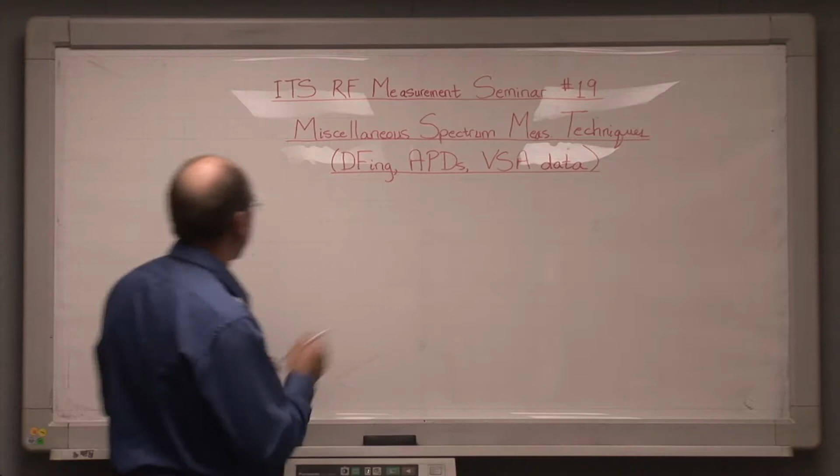The first subject I'll talk about is direction finding, shorthand DFing. I'm going to walk through these topics relatively briefly in this talk. This is somewhat of a survey. There are a lot of techniques for doing direction finding, making APDs, and VSA data in and of itself could be a long talk, but we'll cover these briefly.

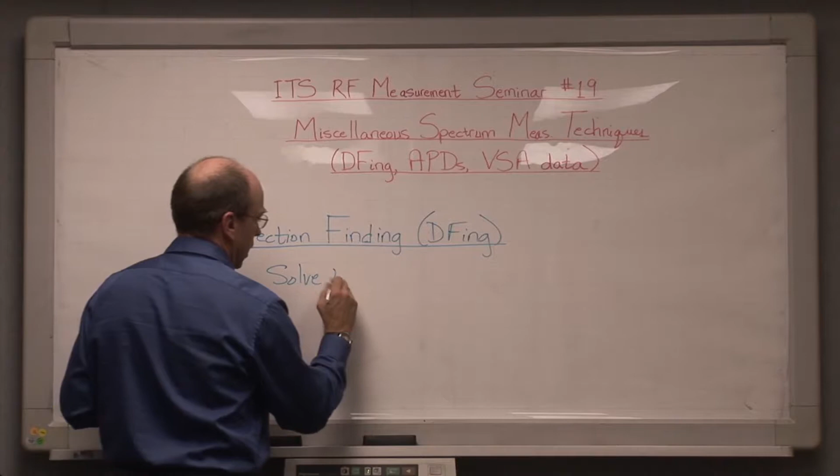Direction finding tries to solve the problem of identifying the azimuth of origin of a radio signal. I'm at pains to always point out that when we're direction finding on a signal, we're not necessarily direction finding on the azimuth where the transmitter is located. We're direction finding on the azimuth where we're getting the strongest received signal from a transmitter. I'll give a real-world example where the two are not the same. It's usually assumed that they are the same.

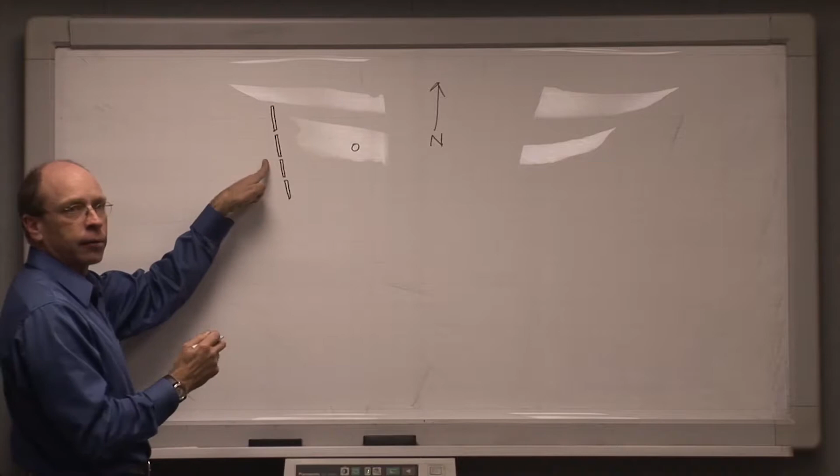Right here in Boulder, we have our laboratory building located at a given location on the Earth's surface. To the west of us we have a set of large rocks called the Flatirons, which seen from above, on a map where this is north, are arranged like this. From ground level or from the side they sketch out looking roughly like this. They're something like 1,000 to 1,500 feet high, tilted back at an angle from vertical, more or less like this. When we're experimenting with direction finding systems here at the lab, sitting with a radio receiving system and looking for the direction of arrival of the strongest signal on a given frequency, we frequently find that our direction finding system tells us the direction of arrival of the strongest signal points back to somewhere along the Flatirons.

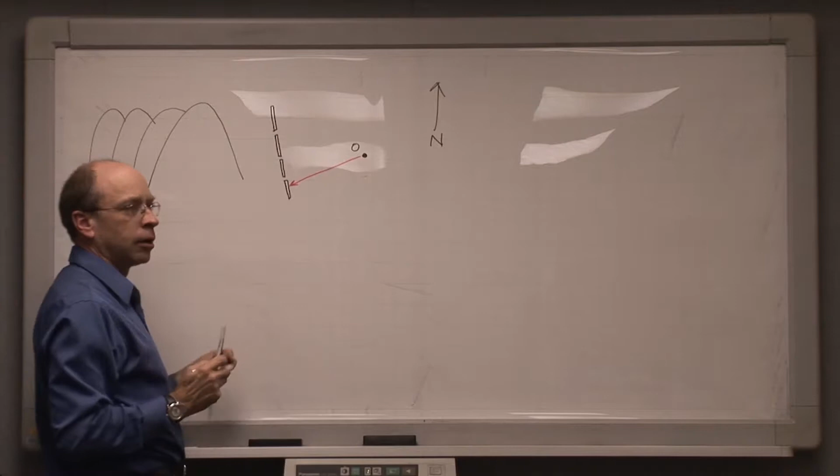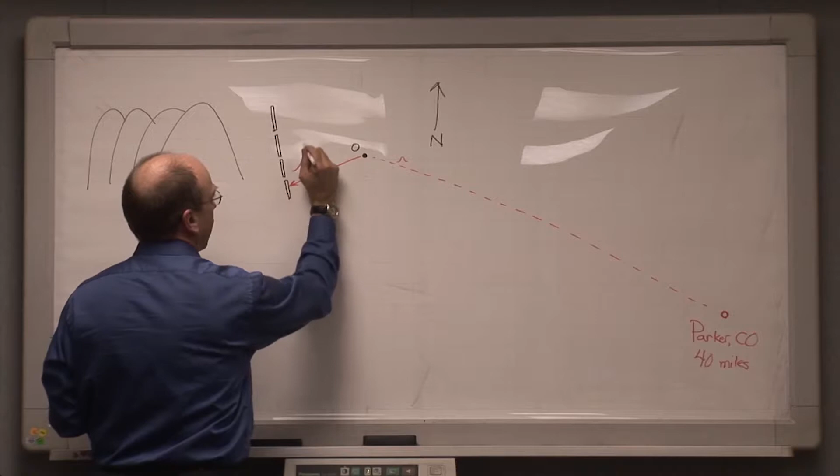We can, for example, do this with the local long-range air route surveillance radar. When we do that, we find that we direction find on the strongest direction of arrival going right back into these Flatirons, roughly west, maybe a little southwest of where we're sitting. Now, it turns out the location where the transmitter is actually located is, for example, at Parker, Colorado, roughly 40 miles from here. If we look in the true direction of the transmitter, we do see a weak signal being received in that direction, but on the frequency that long-range radar works at Parker, we see by far the strongest signal when looking in this other direction.

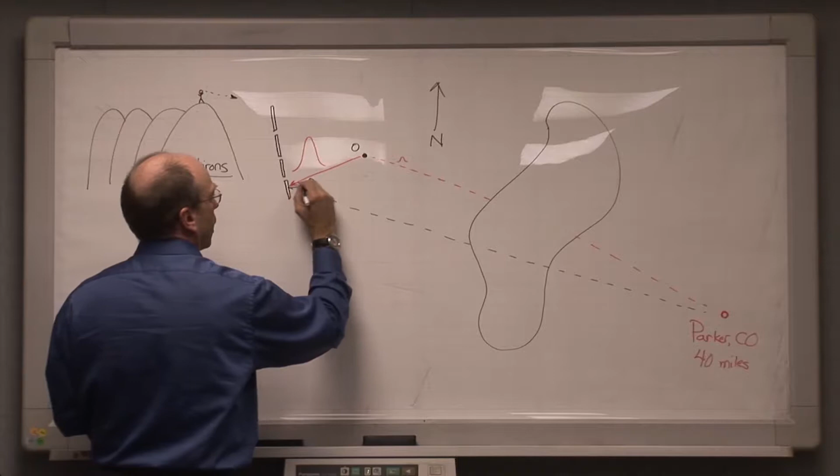The reason is there's a big ridge, which I'll draw like this, that basically separates our lab from the location where the transmitter is located. It effectively blocks the direct path for the radio energy, but if you could stand on top of these 1,000 to 1,500 foot high Flatiron rock formations, you'd be able to see back to the location where that radar is located. These Flatirons have a line of sight connection back to the transmitter. The energy from this transmitter moves this way and has the right geometry to hit the Flatirons at some angle of incidence relative to a normal to the Flatirons, call it theta, and comes off at the same angle theta, propagates in, and sure enough we get a direction finding solution that points back to the Flatirons.

Now, this kind of thing doesn't necessarily happen a lot, but it does happen in urban environments where we have big buildings and skyscrapers in the vicinity. It can happen in places, so just as a cautionary note: you are direction finding on energy, you're not always necessarily direction finding on the transmitter itself.

Obviously, if we're ever trying to locate a transmitter, what we would do is direction find from more than one location and triangulate on it. So, given that we're trying to solve this problem of identifying the azimuth of origin of the strongest signal, what are the ways to do it?

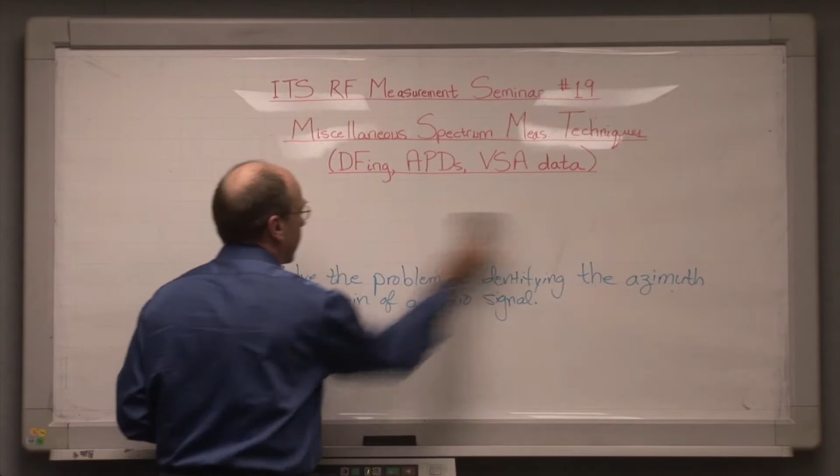The most obvious way is to use a directional antenna, typically but not always something like a dish antenna, where we use some sort of antenna that is, for example, a log periodic. It could be any number of antenna types, we could also have a helical feed, etc. We mount it at the focal point of a parabolic dish, and then use the parabolic dish to scan slowly around the horizon.

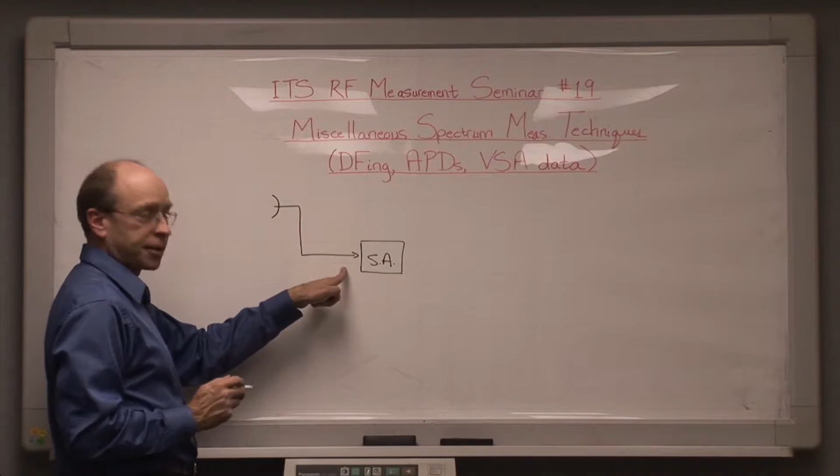As we do that, we have the dish connected to a spectrum analyzer. So we'll set it up like this. Here's our dish. We run this into a spectrum analyzer or any other measurement system that can measure power as a function of time, because what we're going to do is, in fact...

Run a time trace like so, and we'll measure power as a function of time as we rotate the antenna 360 degrees around the horizon. Let's say that it takes one minute to do this. And let's suppose that the signal we're direction finding on stays on continuously.

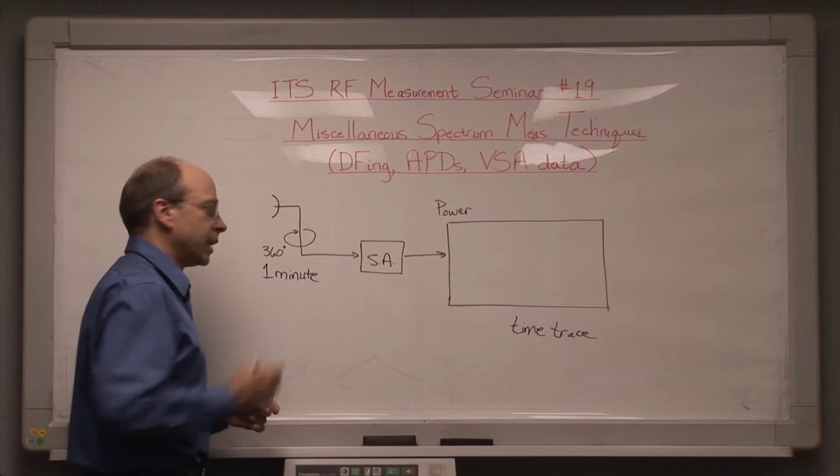If it doesn't stay on continuously, we'll talk about that in a moment. So we start the trace here at time zero. We're going to run the trace for 60 seconds. And as the trace is running, we see our received signal, and in fact we'll probably see something that looks a little bit like this.

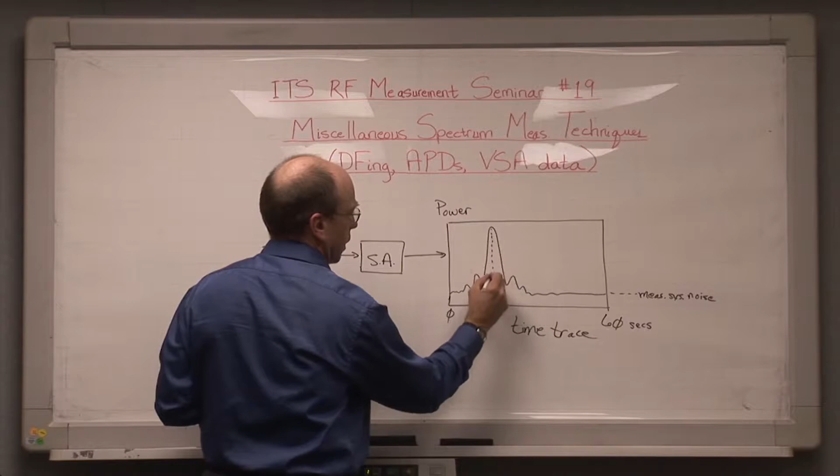Down here at the bottom of the trace, we have the measurement system noise. Here, at this point on the trace, we have a point in time that corresponds to an azimuth in space where the dish antenna was peaked up on the signal, so we can correlate this time to an azimuth. This would go from 0 to 360, so the way I've drawn this would be at an angle of roughly, this would be 0 degrees, 180 degrees, 360 degrees, about 90 degrees.

So this would be east, very straightforward. Now, what do we have over here? What are these features? Those features are the pattern of the dish, the antenna pattern of the dish. If the signal we're looking for is strong enough, we'll actually illuminate the pattern of the dish as we're rotating. So we'll see the pattern of the dish as we turn the dish around.

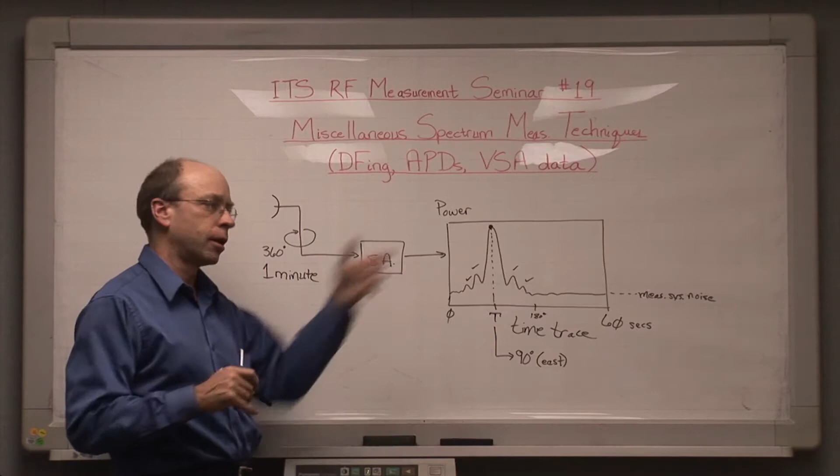Now, if we do in fact have multipath scattering going on in our vicinity—we have a building next to us, we have cars next to us, there are trees, there are fences—the real picture is probably going to be a little more complicated than what I've drawn here.

What we're more likely to see then is something that looks like this pattern, but superimposed on the pattern we'll see the effects of the nearby reflective objects. So we may see a secondary peak here, we might see a peak here, we might see some kind of peak here. These represent energy from the transmitter which is being reflected off of, say, a building, in this case maybe a fence, and in this case maybe another building.

If you're not sure when you're direction finding about what you're seeing on a trace like this, and you're wondering what may be going on, here's an easy way to solve the problem. Move the measurement system slightly from the location where you're currently sitting. If these objects that I've drawn in red are generated by multipath, then if you go to another location close to the first one, but you move yourself say 100 feet or a couple hundred feet, what's going to happen is...

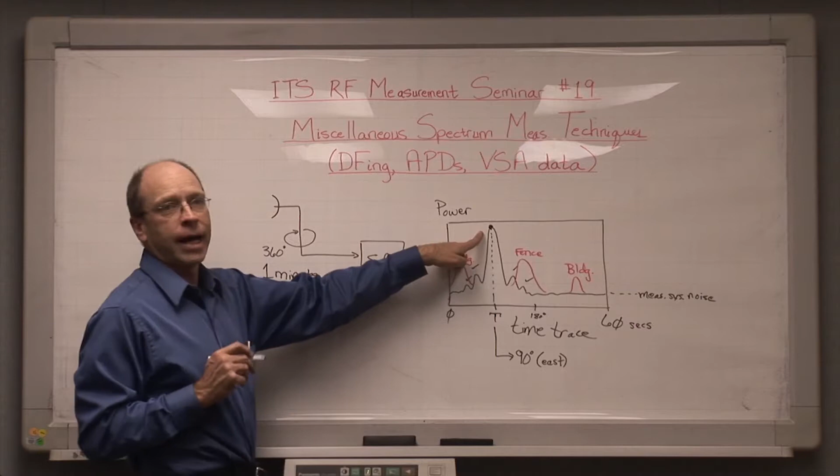If the transmitter is still located at a distance that is far away from you compared to the distances to the nearby multipath scattering objects, this is still going to give you a peak that's at about 90 degrees due east, and hopefully that is the strongest peak—although as I just said, it could be the Flatirons or some big rock formation, a big skyscraper. But the other multipath scatterers that are close to you are going to do two things: they're going to change in amplitude, and they're going to move somewhat in azimuth.

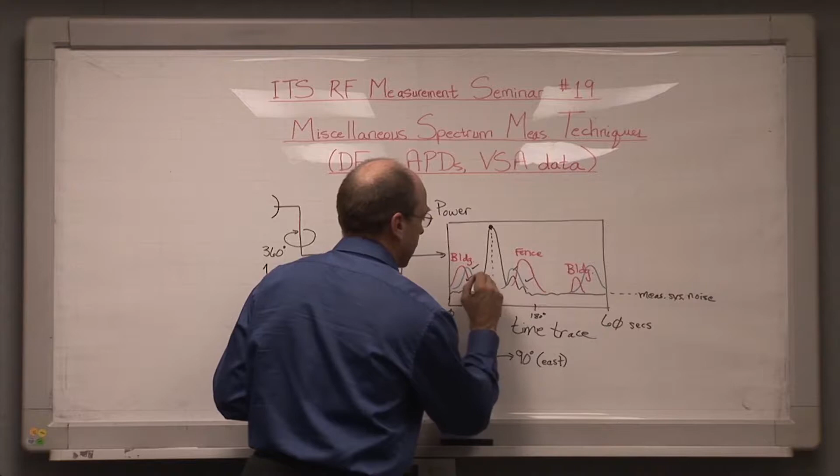So this one would move like that. This one might come in with a lower amplitude, and this one might actually develop a stronger amplitude, but again, it's going to move. If you move slightly, multipath generated by things that are nearby is going to change on this picture, but the energy coming from the transmitter at a distance far away compared to these objects should remain nearly stationary. In a case like that, we might see this move a little bit with a slightly different azimuth, slightly different amplitude, but not much.

This could help reinforce, when you're doing the measurement, the hypothesis that that is in fact the direction of arrival of the signal coming from whatever you're looking for. If you want to triangulate the location of that transmitter, you'll have to move a long distance from where you've started, far enough to give you a substantially different direction of arrival from this location.

If you do several points, this will begin to resolve itself into a sort of polygon of uncertainty, depending on how many points you take. The most likely location for the transmitter is somewhere near the center of the polygon.

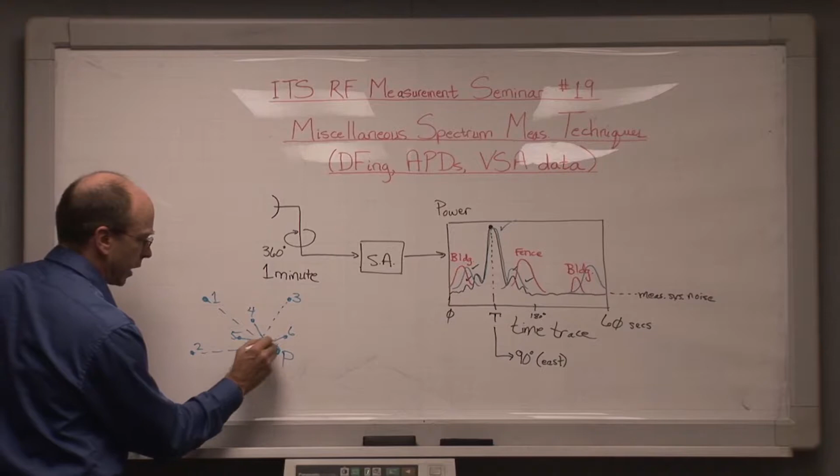To further refine your search using a directional antenna like this, you would probably want to come in closer and take another set of data points, say 4, 5, and 6. Now you'll have not this large polygon of uncertainty, but a relatively small one, and you'll rapidly home in on the actual location of the transmitter, hopefully.

Now, I just described this with the assumption that the transmitter stays on continuously. What if the transmitter is turning itself on and off intermittently? That's more problematic, precisely because while you're trying to scan the dish around the horizon, the transmitter is turning itself on and off.

We could imagine that while the dish is scanning around the horizon, the transmitter turns on during this interval, then turns itself off during this interval, on, off, and turns itself back on during this interval. Now the problem is that if we happen to be aimed in the direction of the transmitter signal while the transmitter was off, we're really not going to see it.

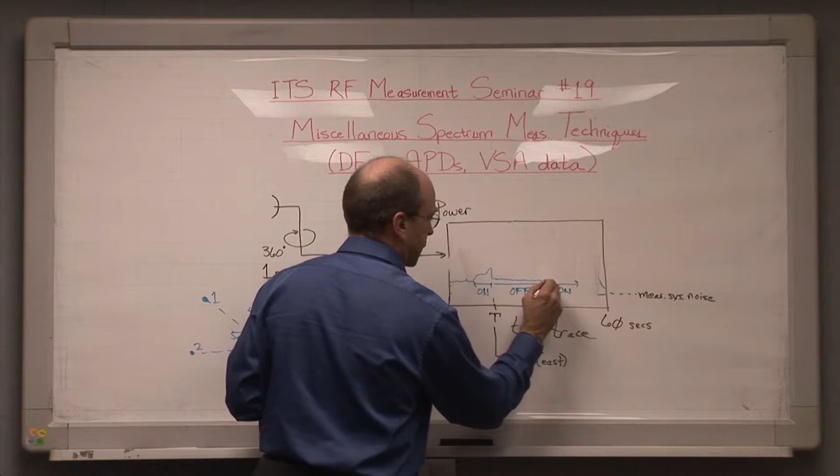So instead we might begin to see the transmitter here as the dish began to come into it, like so. Then the transmitter turns itself off. It stays off—here's the measurement system noise. It stays off. And by the time the transmitter turns itself back on again, we're looking nowhere near that azimuth.

So we say, well, this is rather odd. Instead of illuminating the pattern of our dish, what we got was some gradual increase in energy, and then a sharp truncation. If you see a sharp truncation like that, it's a good clue that the transmitter simply turned itself off at that point.

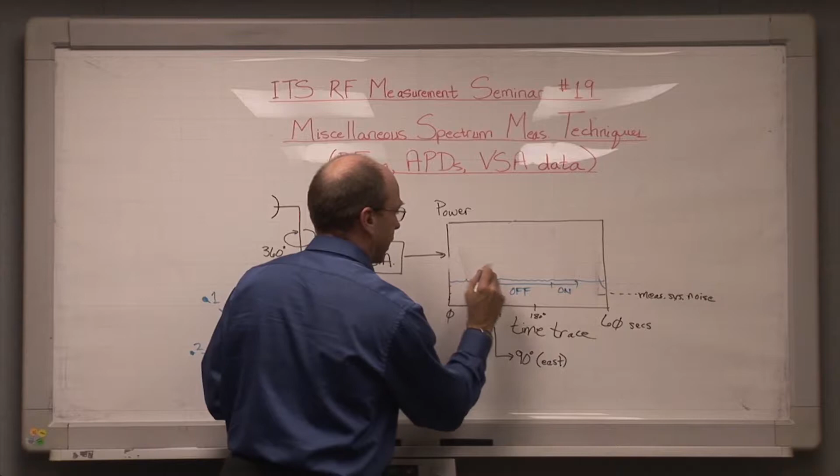The only way to get around this problem is to slow down the motion of the dish around the horizon, and maybe even stop it at certain azimuths and wait for the transmitter to turn on. We graph in some data points like this over a period of many steps around the horizon: stop, wait, get an amplitude as the transmitter turns on, move the dish a little more, stop, wait. A much slower process, filling in.

Oh, it seems to be something turning itself on and off with long off intervals. It becomes difficult to direction find on it.

Suppose that we need to run a mobile measurement operation.

We're looking for a transmitter, and we really need to move down a highway. Putting something large on top of the vehicle isn't a good solution for a lot of reasons. So what we really want, rather than a large antenna like this, is something small that we can use for direction finding.

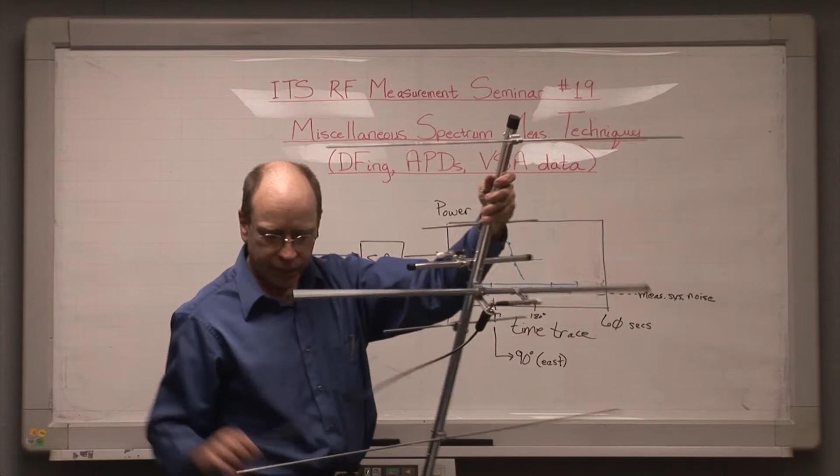If we're trying to peak up on the maximum amplitude, we can go to a smaller, lighter weight antenna like this, which can be held either in the back of a vehicle or out of a vehicular window, and rotated back and forth while we're mobile and moving down the road. This is still not a terribly practical antenna to hold out the window, although I have done it. This, by the way, is a Yagi.

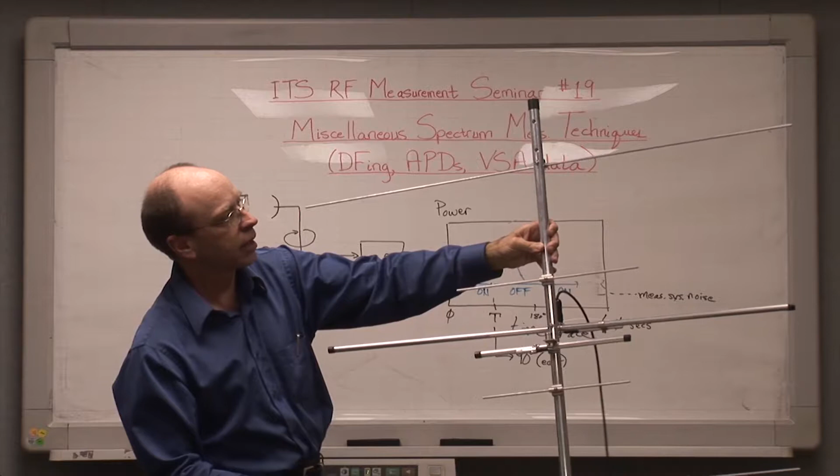This is an antenna made for a particular frequency, or actually two antennas in one, built to work on a small range of frequencies. We could just as easily do this with a wideband antenna, a log periodic array.

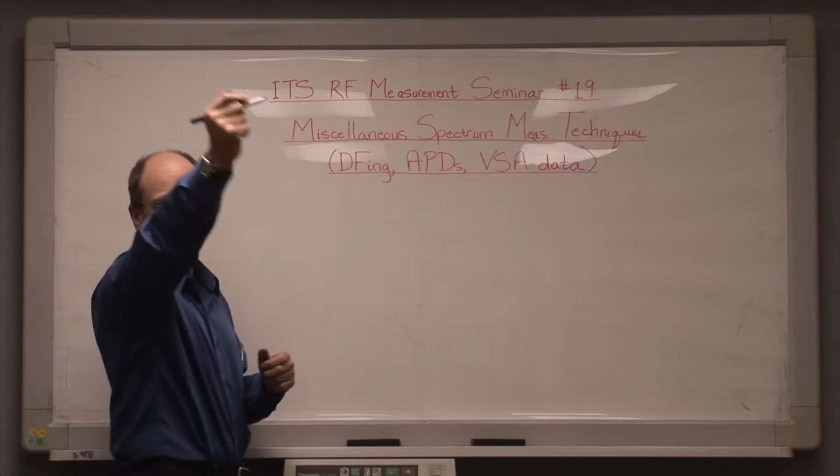But we'd like to go to an even smaller, lighter weight antenna, something extremely easy to hold out of the window of a moving vehicle while driving down a highway to direction find on a signal. The smallest, lightest weight antenna we can imagine, with almost no wind loading when held out a window, is in fact a dipole. We'll assume what we'd build is a half-wave dipole antenna.

Dipoles, in terms of this direction finding technique and construction, are practical for frequencies up to about a gigahertz. They become somewhat impractical above a gigahertz because the physical size becomes really small. At a gigahertz, a half-wave dipole is roughly about this big. Going much smaller than that is just not practical or feasible.

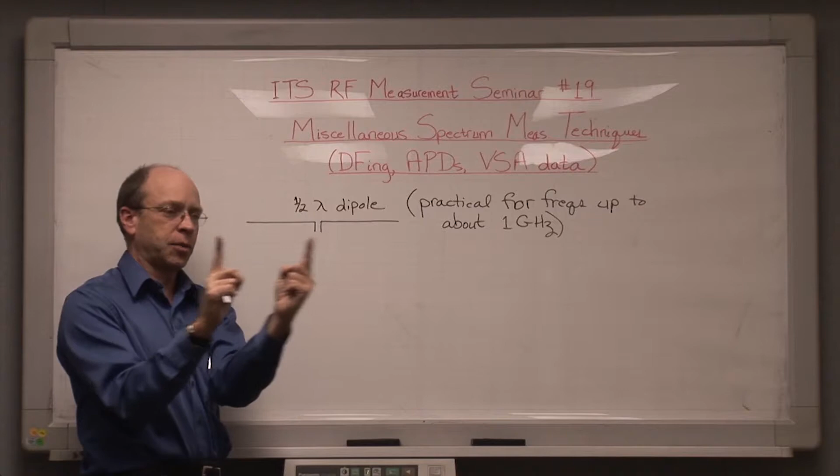But since a lot of the time the signals people need to direction find on are land mobile radio, aeronautical mobile, or other mobile radio signals not found above 1,000 megahertz, a dipole is not a bad measurement solution. But the dipole is not a particularly directional antenna.

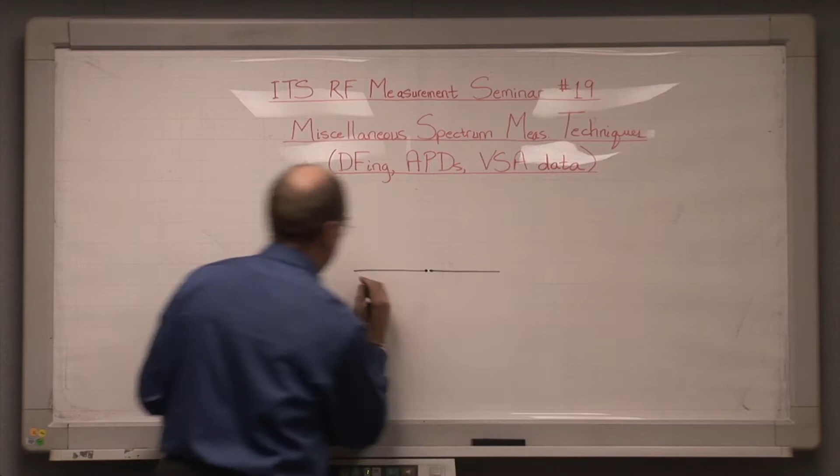The dipole antenna pattern looks basically like this. Here's our dipole. And the pattern, seen either from above or from the sides, has this appearance, like so. The gain of a dipole on either side is about 2.1 dB above isotropic.

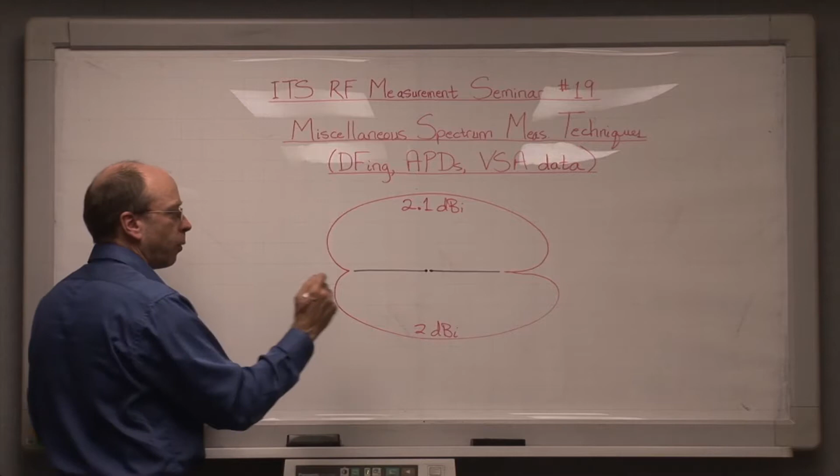It's fairly hopeless to try to direction find using that broad beam. So we don't. Instead of peaking up on a signal the way we would with a dish antenna to find the strongest signal strength, what we do instead is use the null off either end of the dipole to minimize the received signal strength, like so. So the trick here is to minimize received signal strength.

And the technique is still the same. In terms of how we use the spectrum analyzer, I'll just go to the next board.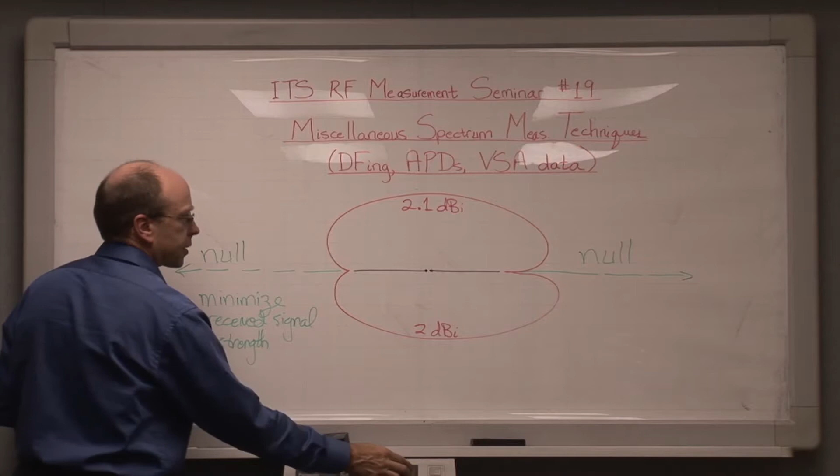What we'll do is assume we are going to operate a mobile direction finding operation. We're going to set up a vehicle, some sort of a sedan like this, not a particularly practical one. I'll draw the wheels slightly larger. There we go. And we're going to have a driver and a measurement person.

Someone, and I have actually done this, is literally going to hold their arm out the window, like so, and hold on to a dipole antenna, like so. And inside the vehicle, we connect the dipole into a spectrum analyzer.

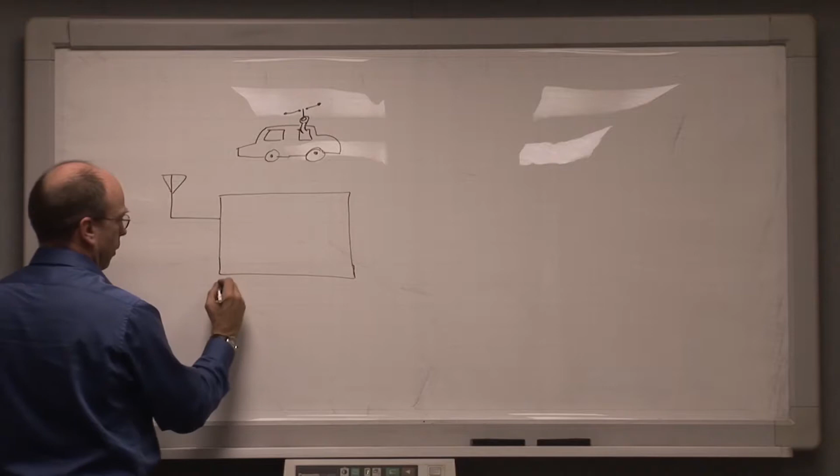Now we'll probably want to set the spectrum analyzer up for something like a 5-minute sweep time in a 0 hertz span on the frequency of the signal we're trying to DF on. And then we start running a data trace on the spectrum analyzer.

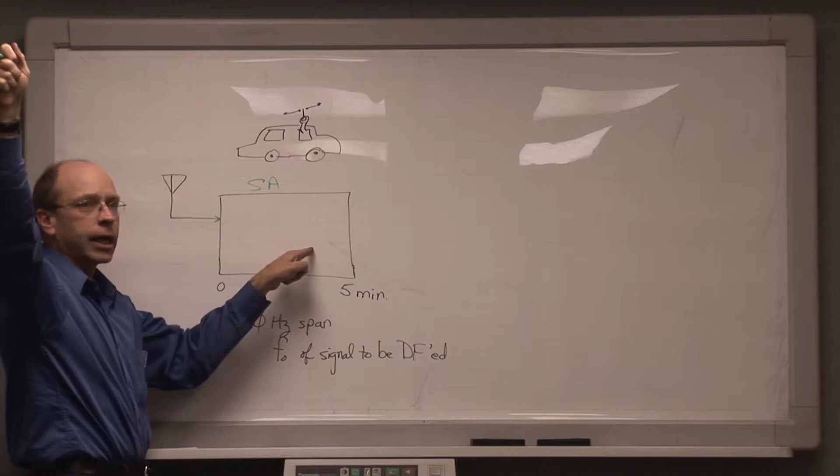As the vehicle is moving down the highway, you simply rotate the antenna back and forth while you watch the spectrum analyzer display. Obviously, the person doing this needs to not be the driver. And what you're going to see will be the signal on a frequency.

As you turn the dipole, it dips down, and as you turn it more it comes back up, and turn it more it comes down, turn it back and forth, and you simply note the direction the dipole is turned on whenever you're able to null the signal out, like so.

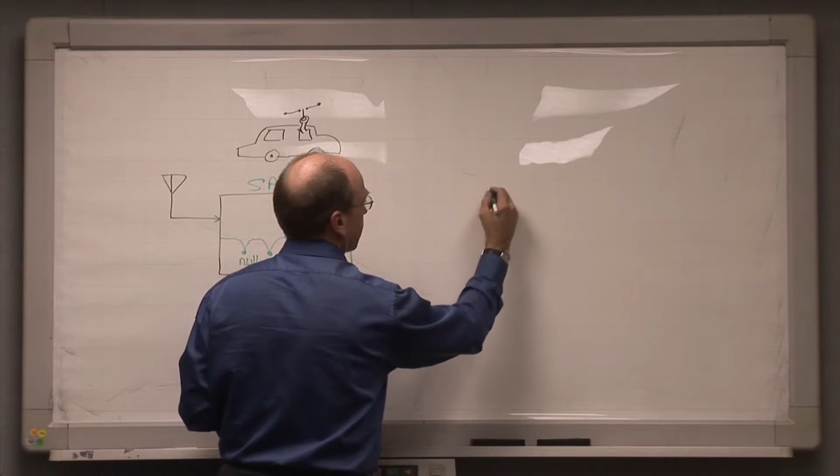That axis identifies the axis on which the signal lies. As we're driving down the highway, here's the highway, we're moving along it like this, and as we go, we find that whenever we have the dipole oriented this way, null, null, null - here's null 1, 2, 3. We say, ah, well, that's it then. The signal nulls when the dipole is held at this angle relative to the car, relative to the highway.

What we now know is the signal is either in this direction or that direction. We don't know which. If we were to modify the dipole such that we only had one null off the end, then we could resolve that ambiguity. Otherwise, what you have to do to resolve the ambiguity is either drive far enough along the highway...

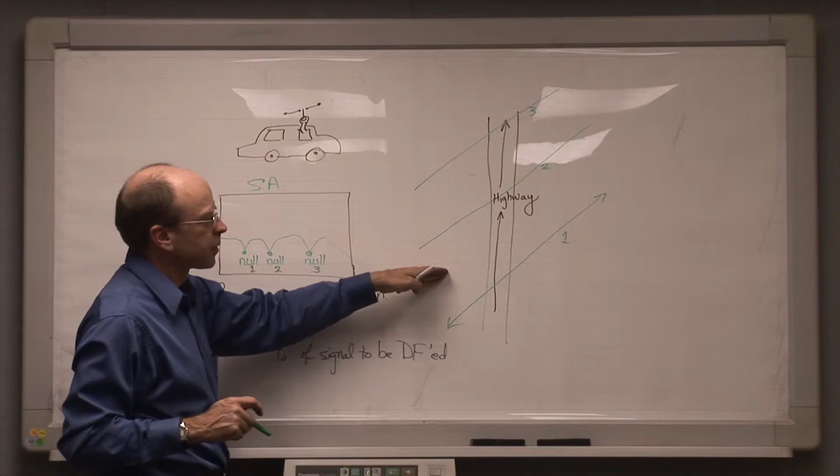...that you begin to get a change in the azimuth to the signal, in which case we know the actual direction of the signal must have been that way, or we actually turn a corner, drive onto a second road, which maybe goes like this, and then start direction finding as we're going along that highway. But the technique is very simple, very lightweight, very easy to implement, and I've personally used this with excellent results.

I like it for its simplicity and robustness. Now, if the signal itself is turning on and off while we're trying to direction find, the trace that I just drew will be modified like this. If the signal were to turn off right here, it would drop out, and then when the signal turned back on, it would come up like that. And if the signal were to drop out here, we'd see this happen, and then the signal would come back on.

The trick is to recognize that the signal is turning itself on and off because we're going to get these abrupt cutoffs where we get a sharp angle - we see the signal power drop instantaneously and come back up again. That's not likely to be due to encountering terrain or multipath. That's almost certainly due to the fact that the signal's turning itself on and off. So it's relatively easy to tell the difference between the signal turning itself on and off versus the nulls we get as we're physically rotating or turning a dipole from side to side.

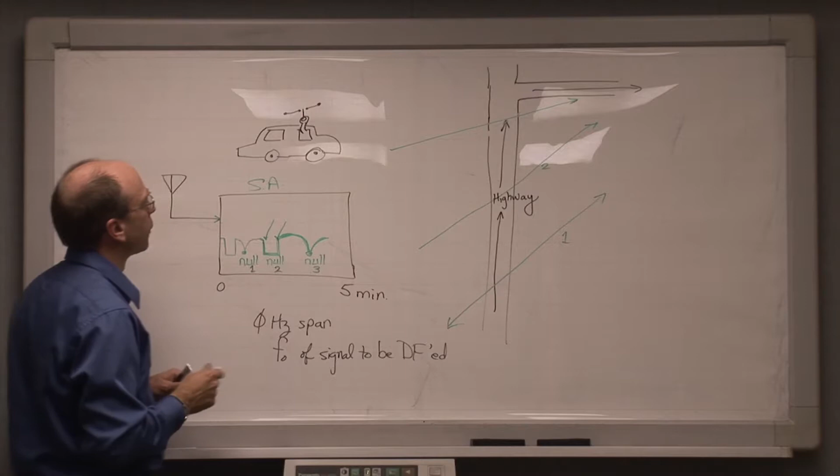Now, suppose, however, that we're not looking at signals that are land mobile radio type signals, or even digital communication signals which have fairly high duty cycles. Suppose that we're looking at the problem of direction finding on a radar.

We've talked enough about radars to know that a typical set of radar pulses graphed in time - here's received power - will look as follows. We'll see nothing while the radar beam is not aimed in our direction, or else we'll see very low amplitude, which is from the side lobes of the radar antenna. Then as the radar beam begins to look in our direction, we'll see a set of 10 to 20 pulses like this, and we'll see this kind of behavior happen every few seconds as the radar beam sweeps over our position.

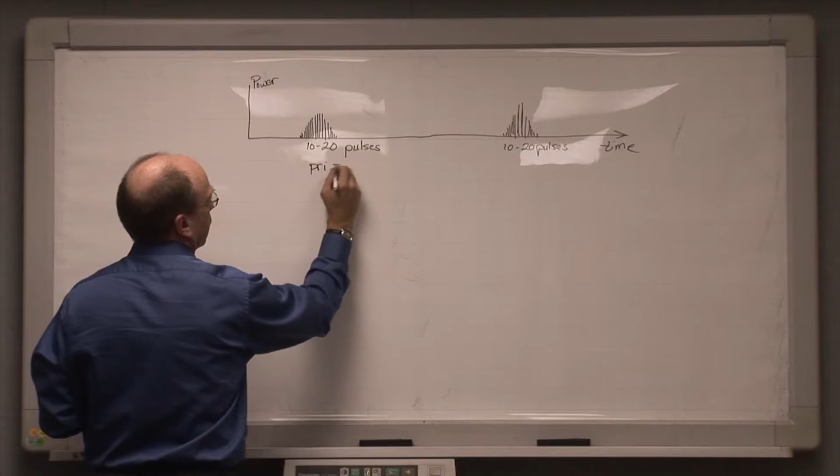And for typical air search radars, the pulse repetition interval will be something on the order of a millisecond. The pulse width will be something on the order of a microsecond. That's for air search.

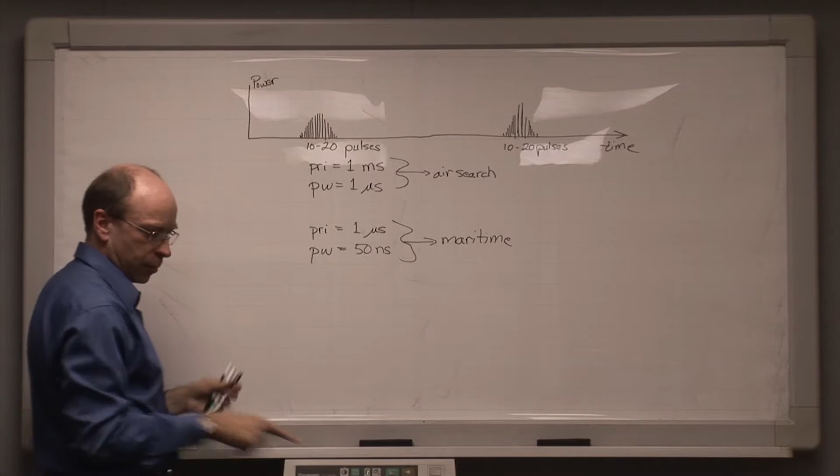The problem with trying to direction find on these kinds of signals by peaking up with a dish antenna - well, first of all, the dipole won't work because these are microwave frequencies, so that's out. Other similar types of systems won't work either, including dish antennas, because any scheme here that is based on a mechanical rotation of an antenna around the horizon is going to suffer from the fact that if we're getting a good direction finding solution by peaking up on the signal, we're going to be using an antenna to direction find, which is going to have something like about a 1 degree beam width.

This is the direction finding antenna. And in order to effectively direction find on a radar, we're going to have to actually move this antenna to a particular azimuth here. Then we're going to have to stop the rotation of the DF antenna.

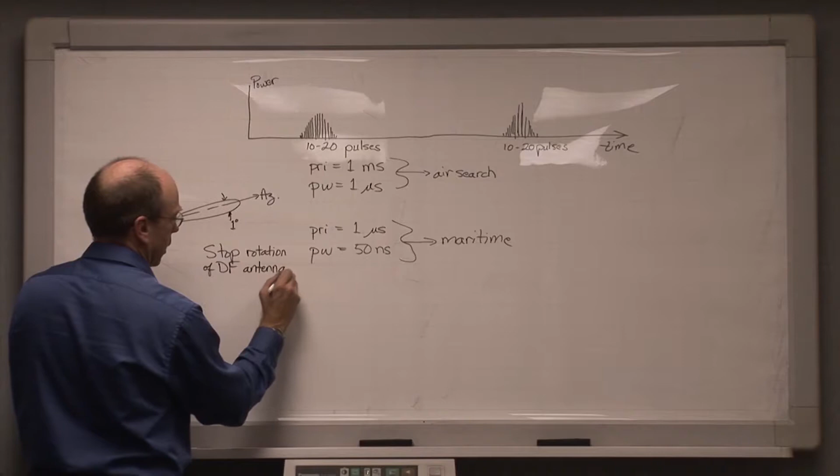And then we're going to have to wait for this interval, the beam scan interval of the radar, which for an air search radar may be, for example, 5 seconds, and for a maritime surface search radar might be more like 2 seconds.

Get an amplitude for receive power on that azimuth, and then move this antenna, the direction finding antenna, by 1 beam width, which is 1 degree. So this is the next azimuth.

And take that data point, and so we're only going to be able to move, in this particular case, 1 degree per, let's say, 5 seconds. And in order to scan 360 degrees around the horizon at 1 degree every 5 seconds will require 360 times 5 seconds, which is more time than we want to take to find a radar for 2 reasons.

We have a limited amount of time typically to work at field sites. Second reason is not all radars are going to stay on or stay present in the area long enough to be able to get an effective direction find on them before the radar itself moves away.

For example, maritime radars are mobile. We also have the problem of aeronautical radars. They're mobile. We also have the problem of any mobile radar.

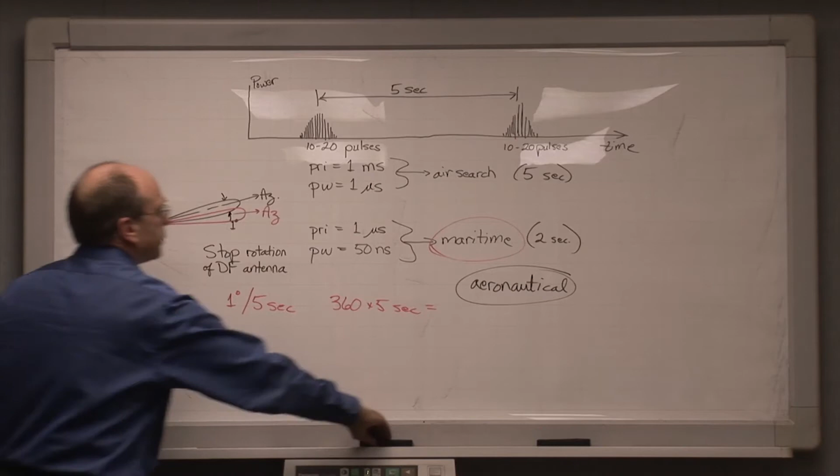So how can we do it? The way that we do it is to build, instead of a high gain dish antenna, although I should say there are spinning dish direction finding systems that are available. Their efficiency and efficacy is not necessarily always everything that you might desire.

But what we do instead is we build an array of low gain antennas, cavity-backed spirals, and we're going to use this array with a fast electronic switch to do the direction finding instead. Here's the principle of the thing.

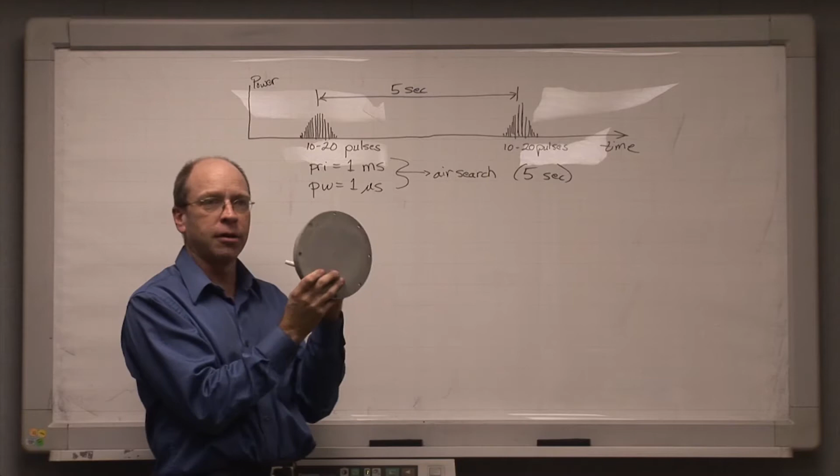A single cavity backed antenna like this has the characteristics of about a 90-degree angle between the 3 dB points in the antenna pattern. So here's 3 dB. And I'm going to draw the antenna pattern here. Here are the 3 dB points.

And I'm going to draw the antenna pattern in terms of antenna gain or response as a function of angle. This is going to represent an angle, ideally, a total of about 90 degrees. And then this antenna pattern comes down like this. And then we have side lobes coming off on either side, like so.

And what we are going to do is now set up an array of these antennas. And here we have an array that we've been building here at the lab.

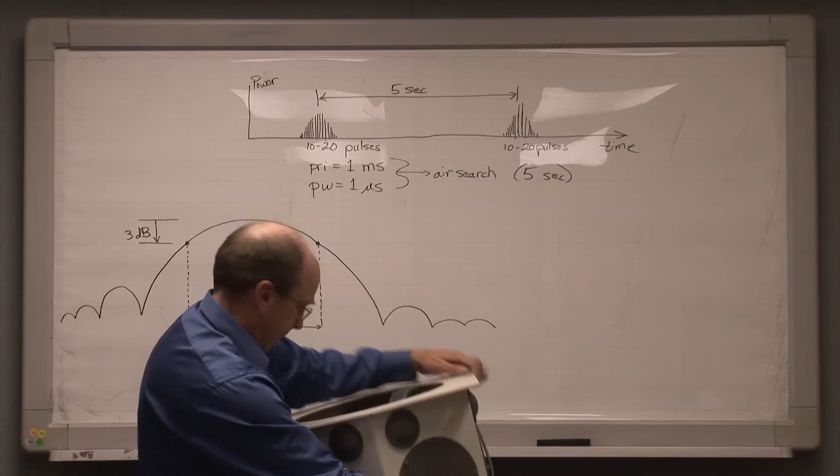This particular array happens to have 6 sides on it, 6 sets of cavity-backed spirals, and on each face of the array we have a low-frequency cavity-backed spiral that goes from 1 to 8 gigahertz, and then a high-frequency cavity-backed spiral antenna that goes from 8 to 18 gigahertz, so we have a total direction-finding capability here of 1 to 18 gigahertz. This array won't work for signals below a gigahertz, but most radar systems operate above 1,000 megahertz, 1 gigahertz. There are some radars that operate at lower frequencies, but the bulk of radars are in the microwave part of the spectrum.

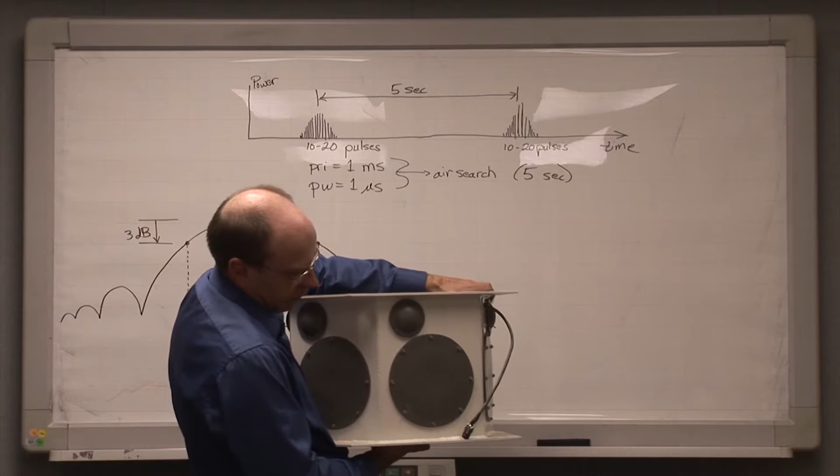Now, are these switched? Now, one antenna set yes. I'm going to explain the details in a moment, but inside the array, as we can see here, we have some electronic switches that allow us to rapidly switch from one antenna to the next as an input into a receiver. What's the principle?

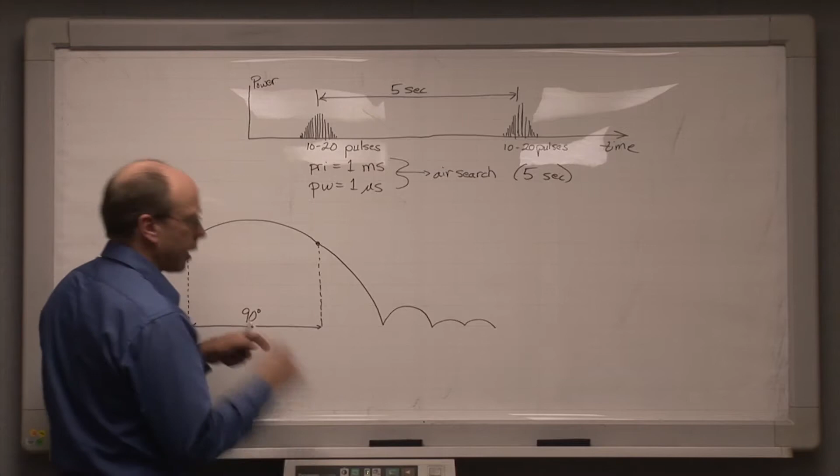The principle is this. Given that we have one antenna located in the array here with a 90-degree beam angle, so this is 45 degrees, we put a second antenna into the array at a 60-degree angle away from that, like so. I'm drawing the array as seen from above, rather crudely I might add. This is supposed to be a hexagon, all right. Like so. This is the array seen from above.

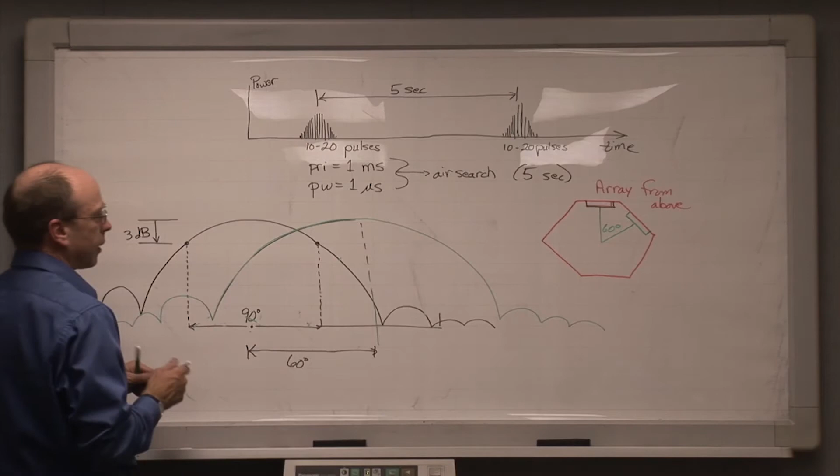90 degrees on each of the antennas. And the technique we use is to try to measure the radar pulses as they're sweeping across our location on both this first antenna, number 1, and the second antenna, number 2, like so. So here's antenna number 1, here's antenna number 2, like so.

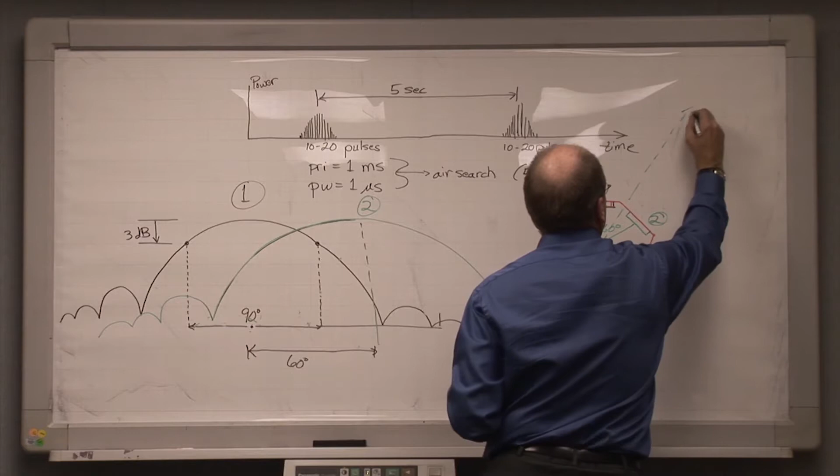Take that off. Now, if a radar is located in this direction, let's make it really easy. Let's assume, first of all, that the radar happens to be located exactly halfway angularly between antennas number 1 and 2. If that's the case -- let me erase this part up here -- then the radar emission is going to come in like this.

And if we can make a measurement of the radar emission on the first antenna and the second antenna while the radar beam is scanning itself across our array, across our location, we're going to get a data point back from this antenna that'll be some number like minus 46.2 dBm, and we'll get a measurement from the second antenna that'll be virtually the same, say minus 46 dBm. By virtue of the fact that we're measuring the same power on these two adjacent antennas, we know the direction of arrival of the radar has to be halfway in between.

Now, in order to know that the direction of arrival really was between these two antennas, we have to not only take a measurement on these two antennas while the beam is sweeping over our location, we have to, in fact, take a measurement on all 6 of the antennas while the radar beam is sweeping across our location.

Now this comes back to the characteristics of the radars we're trying to measure. What we want to do is get a measurement on a group of radar pulses that are almost equal in amplitude to each other. And when I drew this just now, I drew it a little bit, maybe misleadingly.

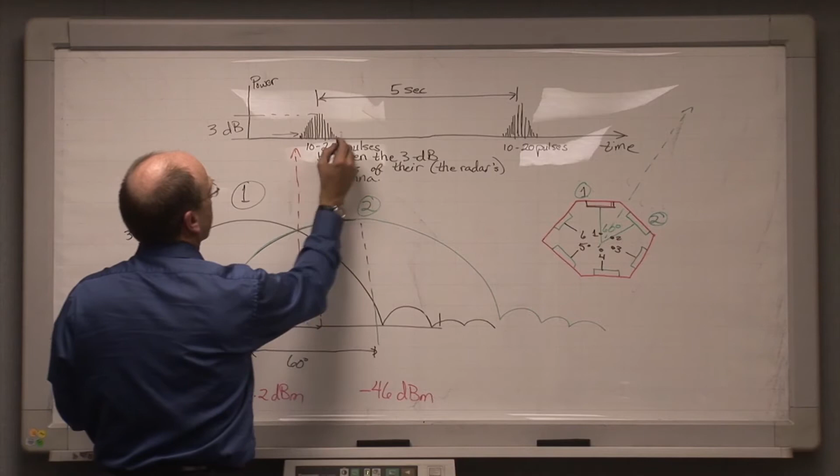So what we need to do with this array is scan the array and take data points -- 1, 2, 3, 4, 5, 6 -- one data point on each of the antennas within the interval that the radar takes to move its antenna across our location between its 3 dB points.

So to take the case of the air search radar, how long is that? Well, 1 millisecond between pulses -- the pulse repetition interval -- and we'll go worst case scenario, we'll say it's generating 10 pulses in that interval. That's 10 milliseconds. So for this air search radar example, we have to get 6 data points in 10 milliseconds. So we have 6 points in 10 milliseconds, and I'll invert that.

We'll make it 12 milliseconds just to make the math easy. So now we get 1 point every 2 milliseconds. That's how fast, roughly, we have to switch this array.

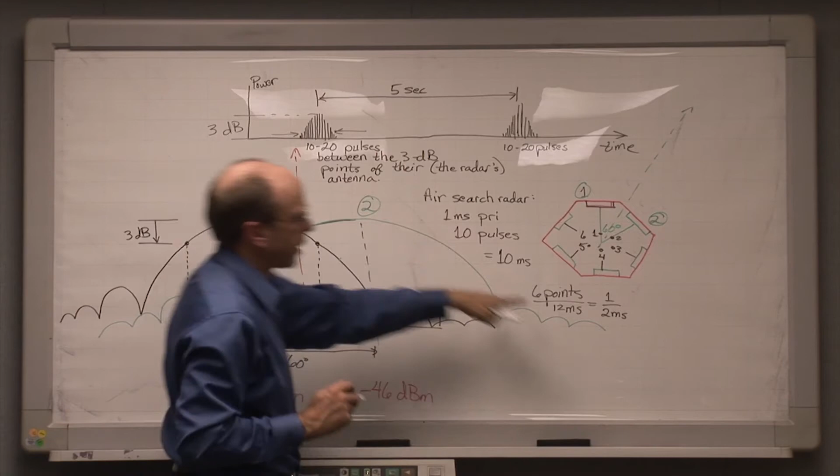Now, if we have a radar that has a pulse repetition interval that is a fraction of this, we're going to have to scan the array itself commensurately faster. There's no way to do that with a mechanical switch, so instead we use electronic PIN switching to switch these array elements rapidly.

But if we do switch the array elements rapidly, we can keep doing measurements continuously, taking each antenna every 2 milliseconds, and we run this array at this data rate, taking a power measurement off of each antenna every couple of milliseconds for a period of 1, 2, 3, 4, 5, etc., until we get to the point in time when the radar scans across our location.

Most radars will look in our direction within 10 to 12 seconds. So we have to keep up this sampling for up to about 10 or 12 seconds if we're looking for a radar on a frequency.

And as we're doing this, we actually load a data array, 1, 2, 3, 4, 5, 6, for the 6 antennas, and the depth of this array goes down for every rotation that the PIN switch does around the array. So we get a set of data points which are minus 100, minus 100, minus 100, etc.

When we're not seeing the radar, minus 100, minus 100, minus 100, over and over again, until finally, at some interval of a few seconds, we get a set of array elements which look more like...

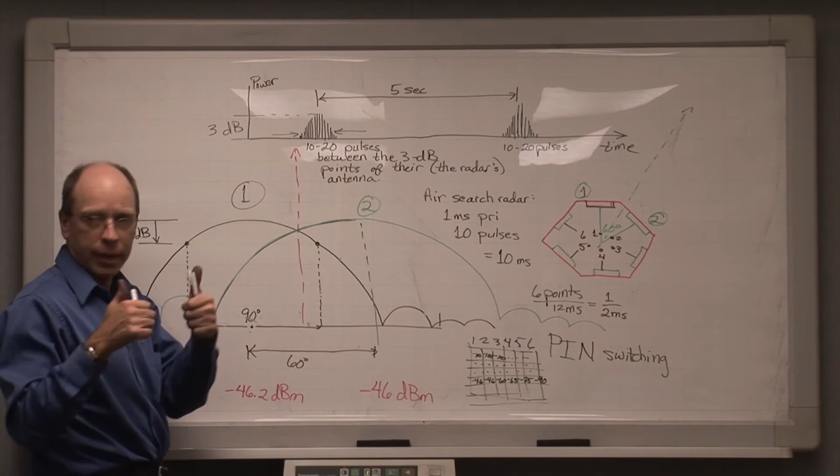In order to localize the radar's position, we first find the 2 adjacent antenna readings that gave us the 2 highest power readings. Hopefully they're adjacent. I have seen cases where they weren't adjacent, where this one and this one, for example, gave the highest power readings, and that's a bad solution.

In that case, we have to wait for the radar to come around, and we'll get it a second time. But assuming that we get 2 adjacent antennas that have the 2 highest power readings out of the 6, we then calculate the direction of arrival of the signal by comparing the strengths of those two readings off those two antennas.

Now, the case I just did is a very simple one. It's one where we got the same reading on the two adjacent antennas, and there obviously we can split the difference on the two. We know that this had to be the direction of arrival going out this way.

If the two power levels are not equal, let's suppose that the two power levels differ from each other by 6 dB. We'll say that this power level on antenna number 2 was the highest, and that the power level on antenna number 1 was 6 dB lower.

Easy. All we have to do is find the point between the two patterns where the difference between the two antenna patterns is 6 dB, and where antenna 2 happens to be the higher of the two patterns. And we then come down here and simply, in software, read off that azimuth.

Now, this direction finding technique relies upon knowing not only what the patterns of the cavity-backed spirals are, but upon knowing what those patterns are when they're built into this kind of a housing, which may itself be sitting on top of a tower, which may be sitting on a vehicle.

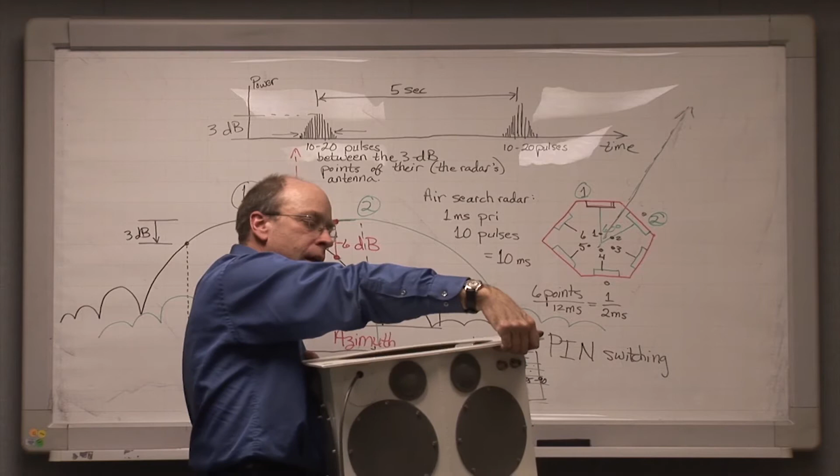And for this, we can actually take this housing out to an antenna range, and we can characterize the antenna patterns of each of these 6 antennas, hopefully they're all the same in the array, on an antenna range.

And having characterized those and graphed them out into a data array in a computer, it becomes a simple matter of doing a lookup: whenever you see power coming in from the two adjacent antennas with some difference between 0 and some larger number of dB, you simply find the point where that power difference occurs between the two patterns when you've picked up a signal, and you say, ah, we've got it.

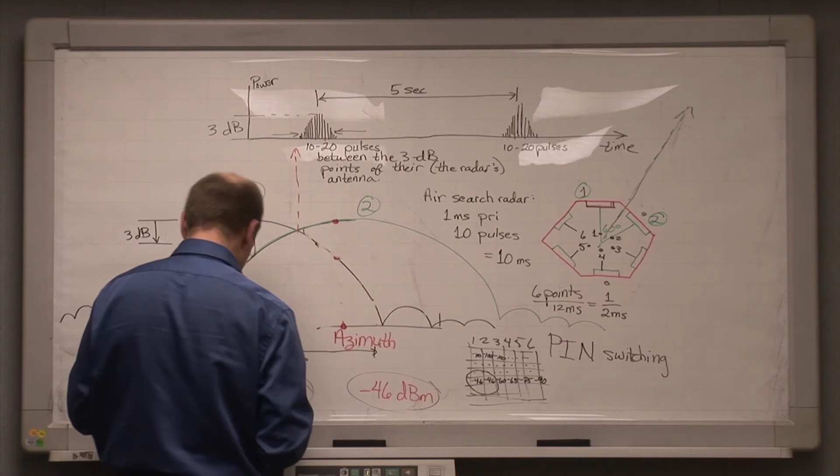Now, the problem that can occur with this is that we can get into an ambiguity. If the difference in power received between the two antennas is sufficiently large that we get a solution which gives us a delta - here's the delta - we'll say, for the sake of argument, that this is a 12 dB difference.

The problem we have is that there's not a single azimuth where we get a 12 dB difference between these two patterns. We get a 12 dB difference here, but we also get a 12 dB difference coming down elsewhere, and so forth.

The problem is that these antennas do have side lobes. If the power difference between two adjacent antennas is large enough to put us into the ambiguity region due to the side lobes, then we're not able to assign the radar to any particular azimuth. In the past, when I've had to deal with this, I provide a default.

I say that the radar is somewhere on antenna number 2, in this case somewhere in this quadrant, but we basically leave it at that. We could even say it's in this quadrant, but probably shifted over to this side. But we don't get a very good solution.

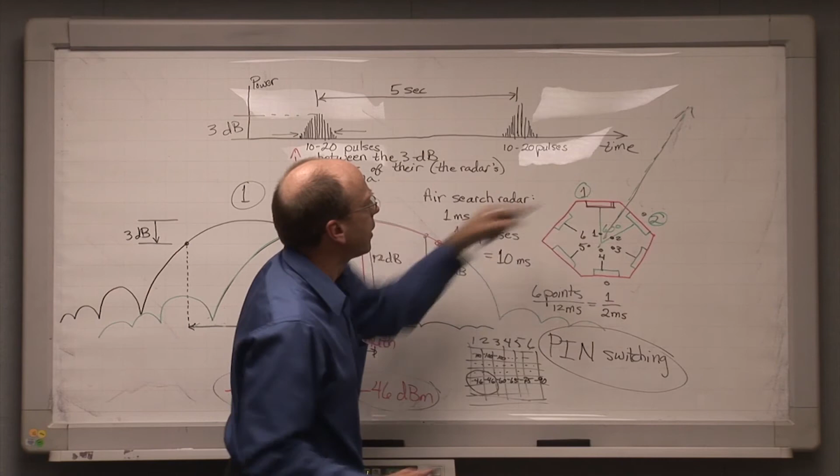It really hinges, other than the hardware you've seen here, on writing software that can process these data points rapidly, and on having electronic PIN switches that can switch the array fast enough to sample all 6 antennas within the time interval that a radar beam requires to scan across your position. That, of course, depends on the kinds of radars we're looking for.

One side note: if you ever go on a harbor cruise and look at Navy ships in any of the world's navies, you'll typically see bumps on the side of the ship that are 3 sides of a hexagonal array. What's going on is they've mounted an array like this on the ship, with 3 sides on one side of the ship and the other 3 sides on the opposite side, indicating there's a direction finding capability on board.

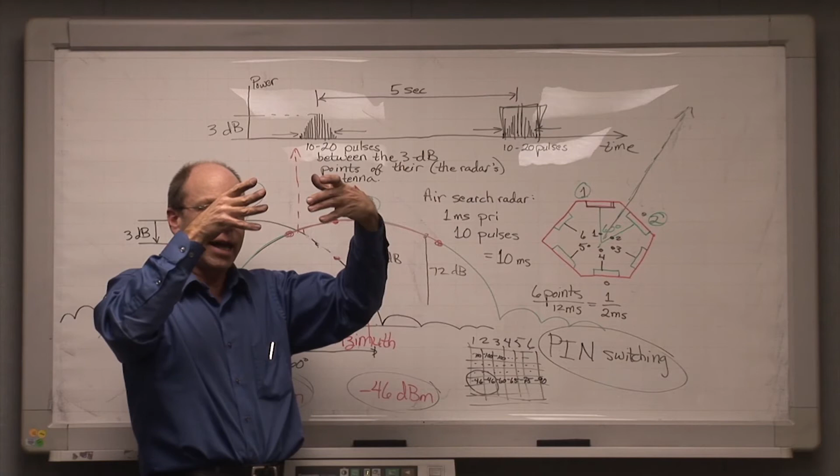You can see this with ships in pretty much any of the world's navies, and you'll often see two of these arrays - 3 large sides on the ship, and a smaller set replicated above it. What they're doing is operating just like we are with 2 octaves, except instead of building the antennas into one flat panel, they've got panels for the big cavity-backed spirals and another smaller set of panels above for the small cavity-backed spirals covering higher frequencies.

But it's a very straightforward direction finding technique. Any comments on that? All right.

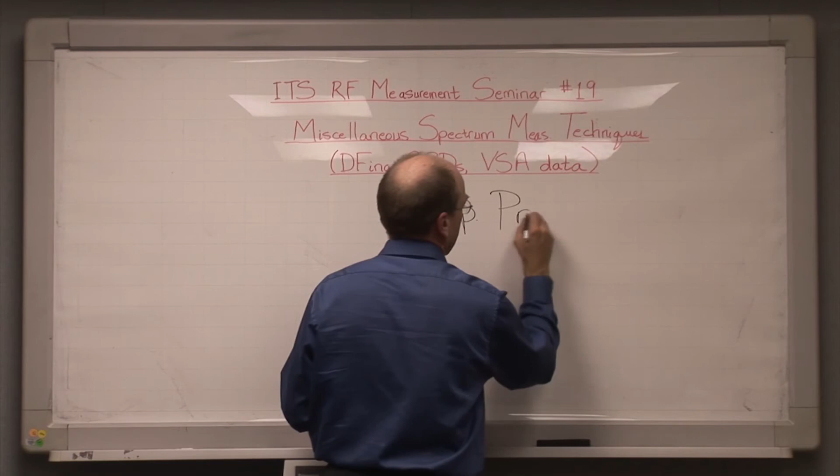Next, amplitude probability distributions, APDs. I'm going to cover these quickly, and the reason is that APDs aren't always covered in coursework, I think. I'll come to why in a moment, but first I'll describe what an amplitude probability distribution is.

An amplitude probability distribution is nothing more than a graph, a set of data points that shows voltage, or we can convert it to power. It's really a voltage threshold, graphed as a function of the percentage of time that energy, because it may or may not be a signal, in fact it's typically noise but not always, exceeds the voltage.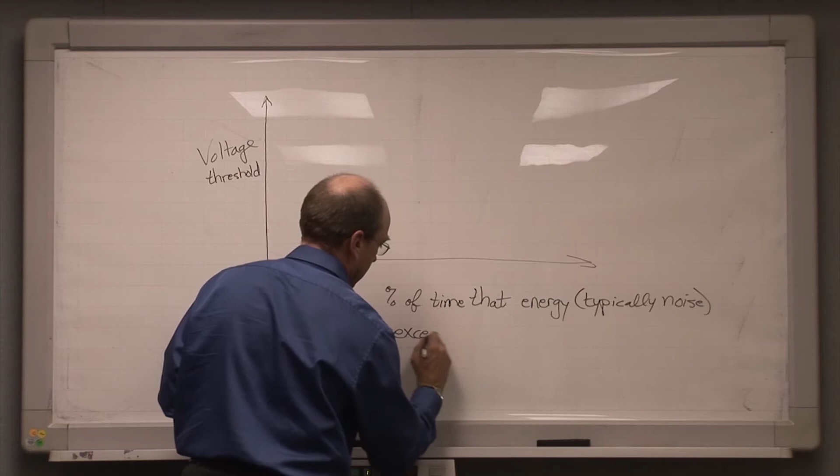The typical way to graph this out is to render the voltage into decibel units of power, which means this is a log plot versus the log of the percent of time that the signal or the energy or the noise is exceeding the threshold.

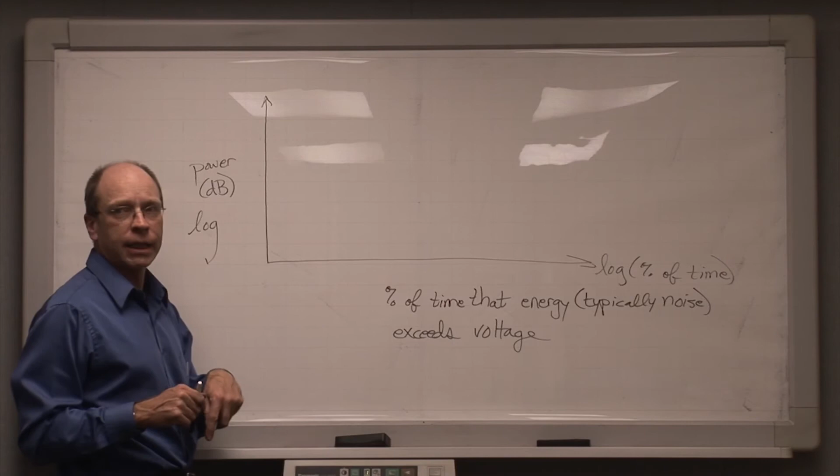Now why would a person want to do this? The reason is that although many radio systems today are built with the assumption that the radio receiver is going to have to work in an environment limited by Gaussian noise, in fact it may often be limited by thermal KTB noise inside the receiver circuitry, which, on this kind of plot, will produce a straight line with a slope of -1, and this could, for example, be KTB noise, thermal noise.

Although many radio systems today are designed assuming the radio will work against Gaussian noise, in which case we don't really need an APD, there are cases in which non-Gaussian noise occurs in an environment, and you usually cannot gauge the performance of a radio receiver in a non-Gaussian noise environment simply by measuring the average power in the non-Gaussian noise.

The reason is that the non-Gaussian noise is going to be somehow clumpy in time. Basically, for example, it could be pulsed. You get a high pulse of energy, then nothing, then a high pulse of energy, then nothing, then a high pulse of energy, and then nothing. If a radio receiver is trying to work in that kind of environment, that is a non-Gaussian noise environment.

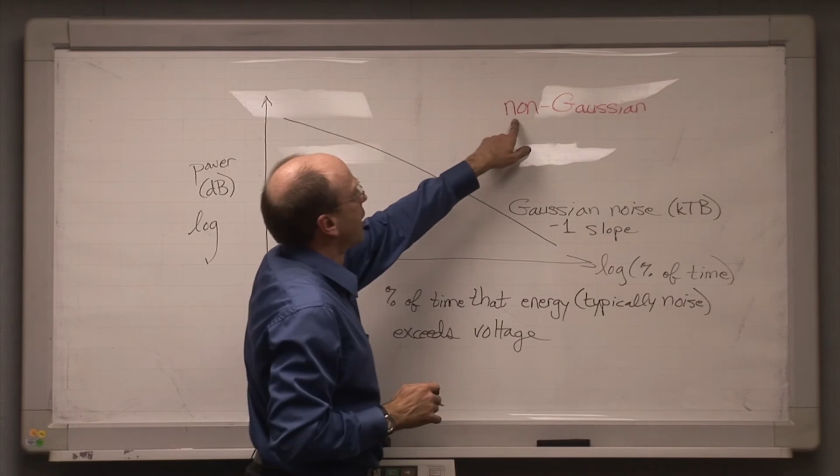Simply taking the mean power on non-Gaussian noise will not tell you how the receiver is going to behave, because the noise energy is coming in some sort of distribution that's somehow clumping itself up, pulsing itself. The statistics we need to assess the radio's performance then often have to be obtained from an amplitude probability distribution. So first I'll show how we get it, which is dead simple, and then I'll show what a typical non-Gaussian noise or energy distribution might look like.

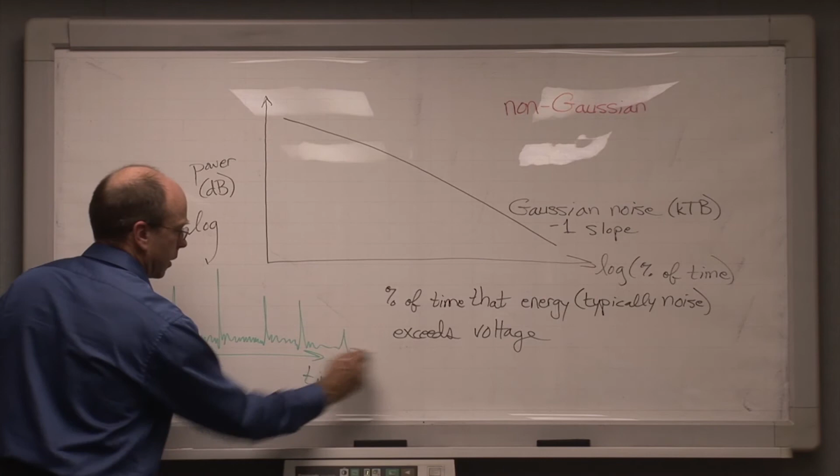To get the APD data, we go back to working in time, and we measure power. Power is a function of time, and we're going to see something like this happening. I'm drawing non-Gaussian noise here. Although unintentional man-made emissions can produce this kind of noise, other sources include lightning, which is a problem down at lower radio frequencies. Back in the old days it was a problem down in the AM radio band, but lightning, ultra-wideband transmitters, etc. can produce non-Gaussian noise.

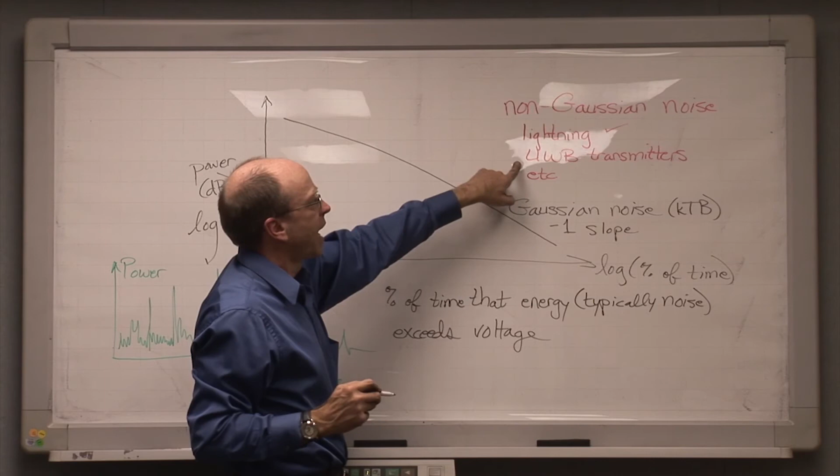So in the old days, people were worried about building systems that might encounter noise from lightning. Nowadays, people might be worried about building receivers that have to work in an ultra-wideband transmitter noise environment. In either case, we want to get the statistics on the time waveform, and what we do is sample the time waveform like so. Very simple, dead simple. We need to sample it long enough to make sure we're getting a good representative set of data points.

Then, all we do, using software, is produce this set of thresholds, and it's really nothing more than a sorting problem. We sort all of the points that we took through some interval of time, and we simply plot the percentage of all the points taken over that interval, in terms of their power level, versus the percentage of time, which is the same as percentage of points that exceeded some given power level.

For example, we have basically one point in this whole array that hit this nice high power level. So we have one point up here, and as we come down, we don't have too many points at these higher power levels. We've got one here, we keep coming down. Oh, there's one, there are two, there are three. So now we have a lower power level, but more points exceeding that power level. So we get something that looks like this. And as we graph this out for the non-Gaussian noise, we get a curve that looks typically like that.

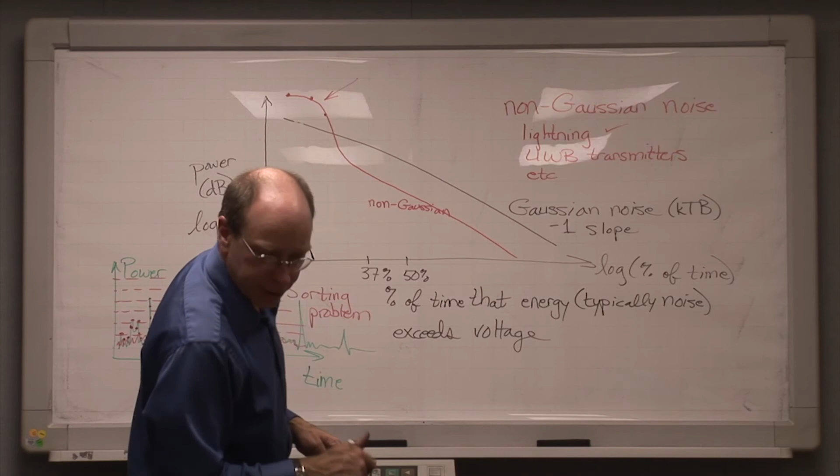Up here we're seeing the effects of the source, the lightning, the ultra-wideband, whatever it might be. We can use some particular points in this graph. Let's say this is 37%, and this is 50%. At about 37%, we have average power. We can also graph average volts, and we can also graph median power at 50%, and so forth.

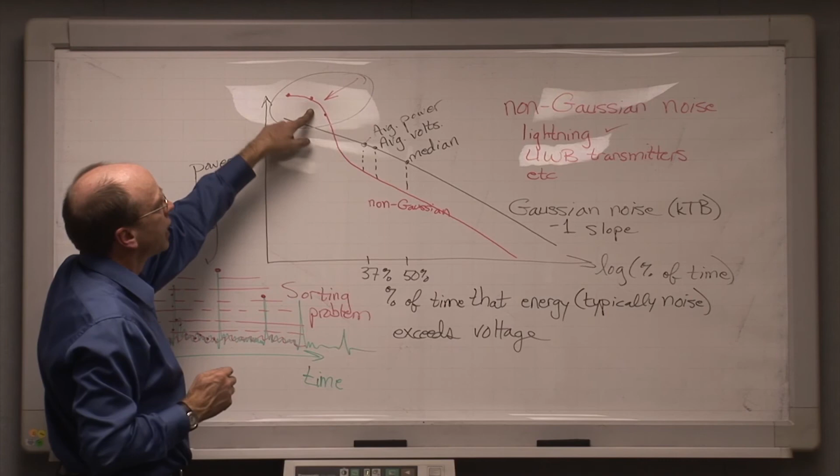The beautiful thing about this, and we can do the same for non-Gaussian cases, is that with the APD we can see what this characteristic looks like. At NTIA, we've used these data graphs extensively in analyses of the performance of receivers in the presence of emissions from ultra-wideband transmitters. I'll leave that discussion there, just to point out that this tool is available. It's relatively easy to get the data graphs, and a person could go through their entire career without ever working with this, but if you're ever working in a non-Gaussian noise environment that may degrade receiver performance, it's worth knowing that APDs exist and are needed.

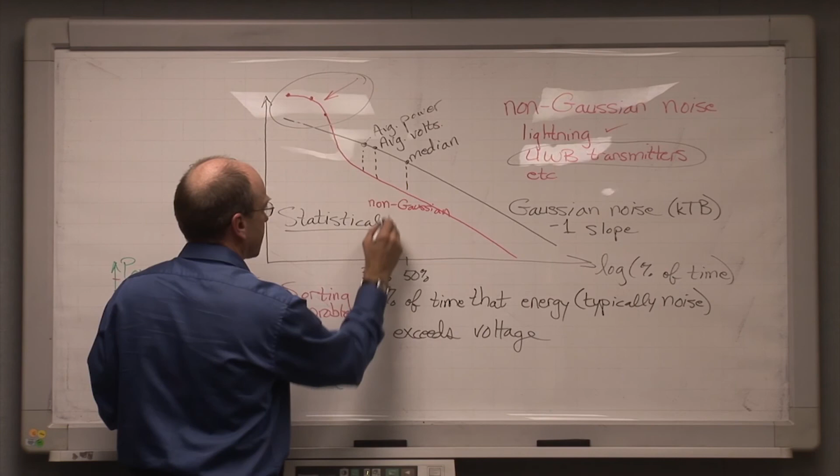One last thing: if you have an APD graph like this, you cannot go backward to reconstruct the time diagram. For example, if we had pulses coming through that were, say, 1 millisecond apart, we cannot get that 1 millisecond pulse spacing off the APD. For that, we have to go back to the original time data we collected to see what the spacing is. So the APD gives us a nice statistical picture of noise, but it does not allow us to go backward to what the noise looked like. If you want to see the spacings between pulses in time, you'll need to retain the original noise data.

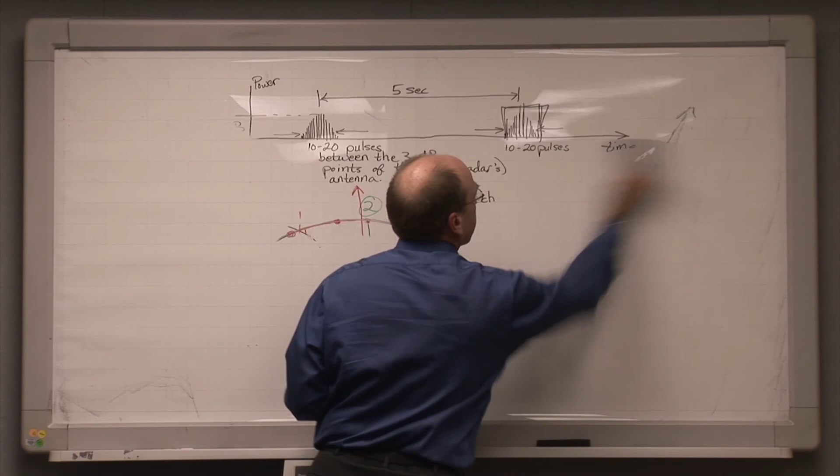The last topic, which I'll just touch on briefly, is data that we can take from a time sampling machine, a vector signal analyzer, which here at ITS we've typically used on radars, but it can also be used on digital data signals. I'll cover these very briefly.

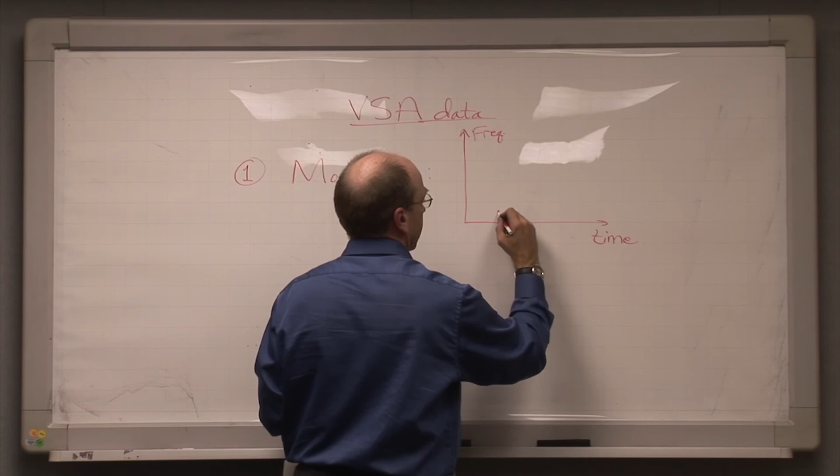First, the modulation domain. Modulation domain information shows the frequency of a signal as a function of time. For example, a chirped radar pulse will look like this, then drop off, and we see noise. This would be a radar pulse that turns on at some point, has a frequency that varies linearly through time, and then turns itself off. This is measurement system noise on either side. Systems that are linear frequency modulated will look like a sawtooth or ramp, and a nonlinear FM modulation will look something like that. These can be used for any frequency modulated signal, basically.

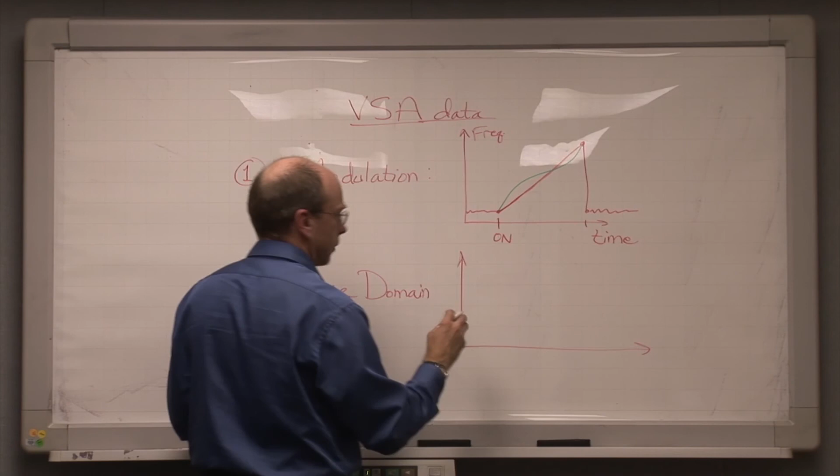Secondly, phase domain. In the phase domain on the vector signal analyzer, we generate a picture which likewise shows phase as a function of time. This can be used with digital data signals, and again radar pulses and others, but these are the two major applications. Again, what we'll see is measurement system noise, then coming out of the noise we see a change in phase, and if we're looking at pulses, either digital data turning on and off or a radar pulse, the system will terminate and we're back down into the noise. With this data in hand, we can analyze either of these two types of signals.

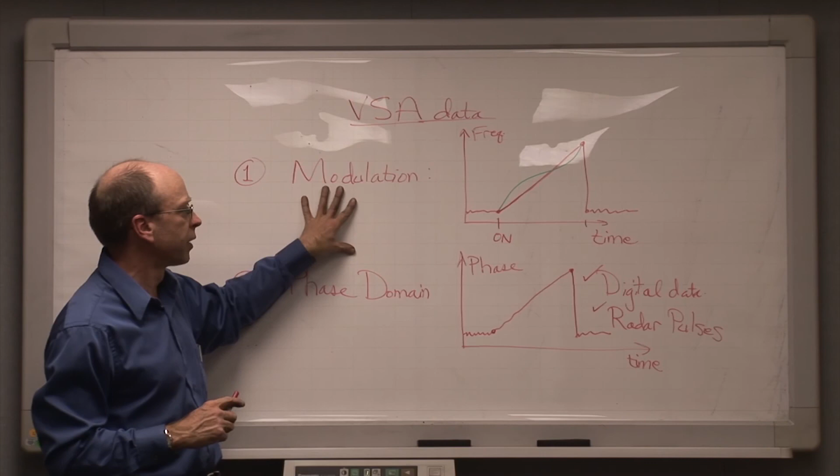Although that's brief, I'll leave it at that unless there are any particular questions. I just want people to be aware that we have these capabilities available in VSAs, and that they are useful for looking at both modulated radar pulses and digital data signals typically, but not always.